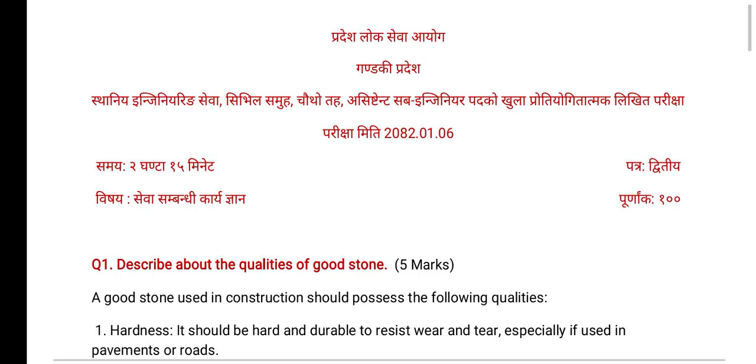प्रश्नोत्तर सहित हामी उपस्थित भइसकेका छौं। यहाँहरुलाई नमस्कार, स्वागत छ। प्रश्न नम्बर 1: Describe about the qualities of good stone.

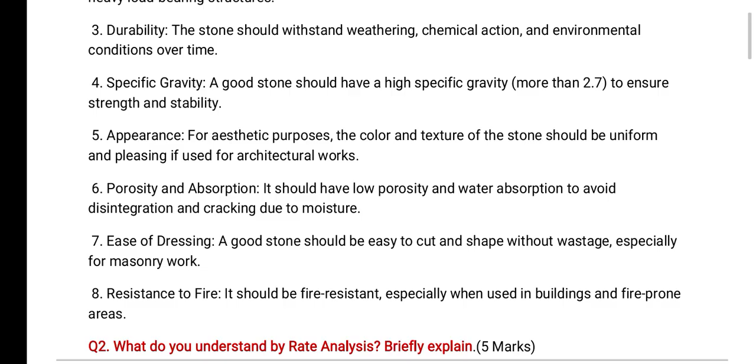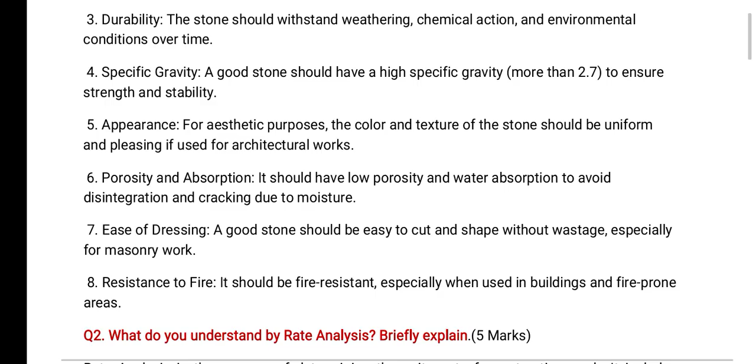सेक्सन ए को पहिलो प्रश्न जुन 5 मार्क्सको लागि सोधिएको थियो हामीले त्यो गर्यौं। अब हामी क्वेशन नम्बर 2 तर्फ लागौं। क्वेशन नम्बर 2 रहेको छ, What do you understand by rate analysis, briefly explain, 5 मार्क्समा सोधिएको छ।

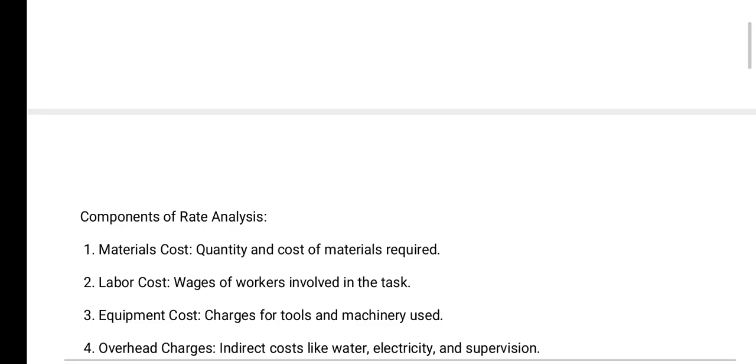र हाम्रो कम्पोनेन्ट्सहरु, rate analysisका कम्पोनेन्ट्सहरु के हुन्छ भन्दाखेरि एउटा मटेरियल कस्ट हुन्छ, एउटा लेबर कस्ट हुन्छ, इक्विपमेन्ट कस्ट, ओभरहेड चार्जेस एन्ड कन्ट्र्याक्टर्स प्रॉफिट।

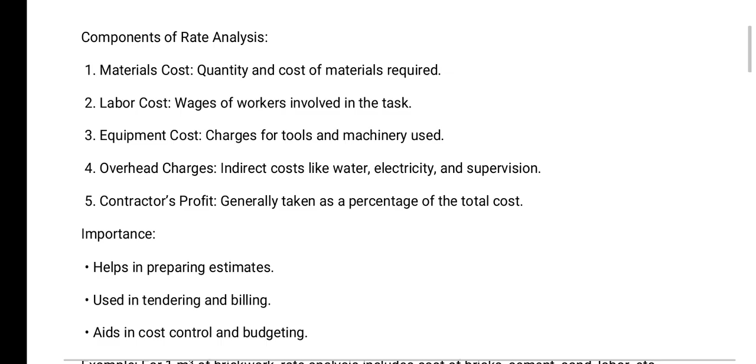Rate analysisको इम्पोर्टेन्सको बारेमा कुरा गर्नुपर्दा, it helps in preparing estimates. Rate analysis is used in tendering and billing, and rate analysis aids in constructing, cost control and budgeting.

Example of a rate analysis is for 1 meter cube of brickwork. Rate analysis includes cost of brick, cement, sand, and labor, etc.

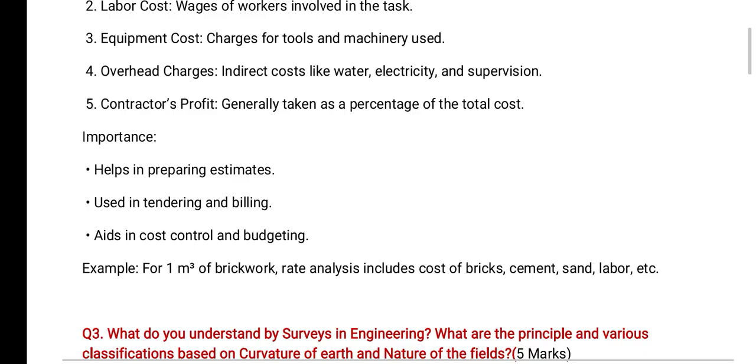Let's move towards question number 3, 5 marks को लागि नै रहेको छ। What do you understand by surveys in engineering? What are the principles and various classifications based on curvature of earth and nature of fields?

Surveying in engineering is the process of measuring and mapping the relative positions of natural and man-made features on Earth's surface. It is essential for planning, designing, and executing engineering projects like roads, bridges, buildings, etc.

Principles of surveying: working from whole to part. First, establish a control network, then do detailed work to reduce error accumulation. Next principle is location of a point by measurement from 2 points of reference, using methods like triangulation or intersection.

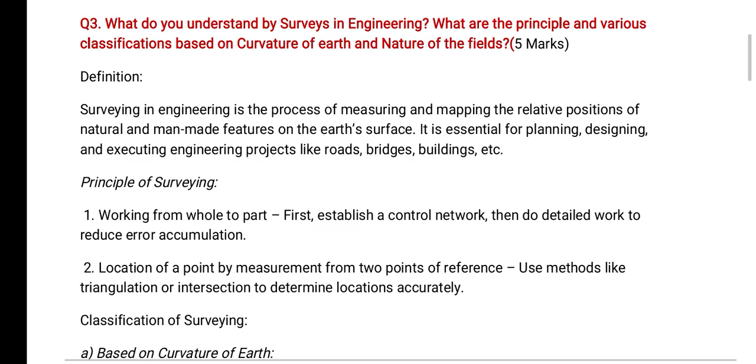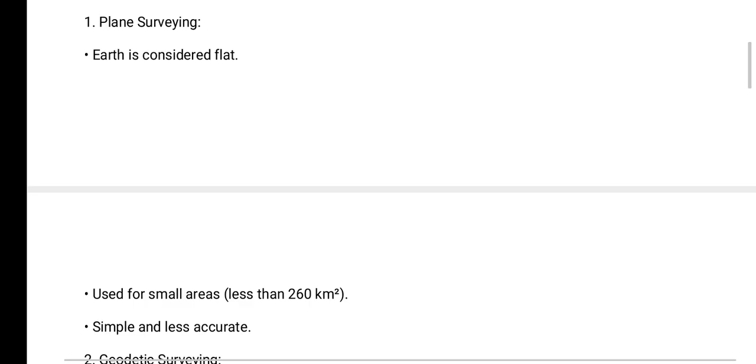Classification based on curvature of earth: plane surveying, where earth is considered flat. In plane surveying, area to be used is less than 260 square kilometer and it is a simple and less accurate process.

Likewise, next is geodetic surveying, where earth curvature is considered, used for large areas and requires sophisticated instruments and methods.

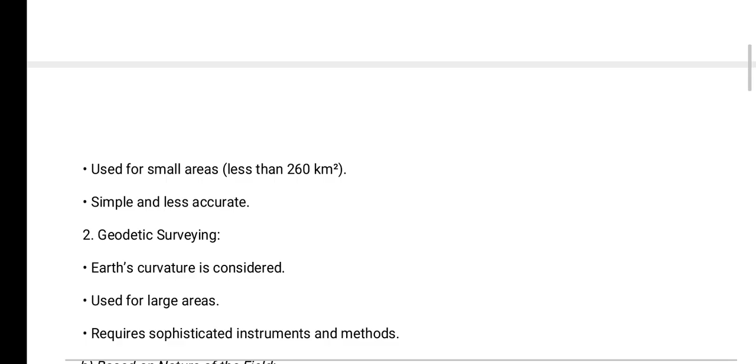Classification based on nature of field: number 1, topographical survey. Number 2, cadastral survey for property boundaries and land ownership.

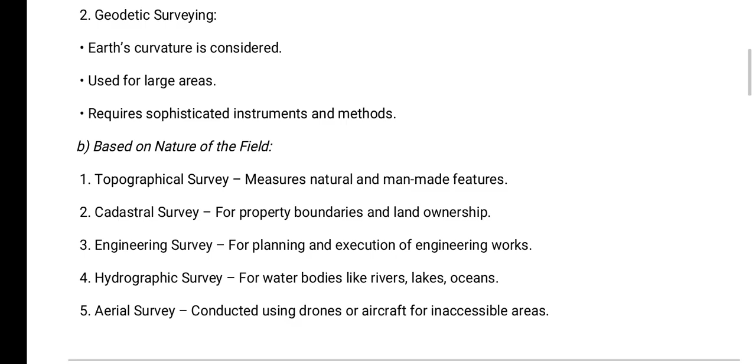Number 3, engineering survey for planning and execution of engineering works. Number 4, hydrographic survey for water bodies like rivers, lakes and oceans. Number 5, aerial survey conducted using drones or aircraft for inaccessible areas.

Next question is question number 4, 5 marks को लागि। Write the differences between waterproofing and dampproofing, provide a comparative note भनेको छ।

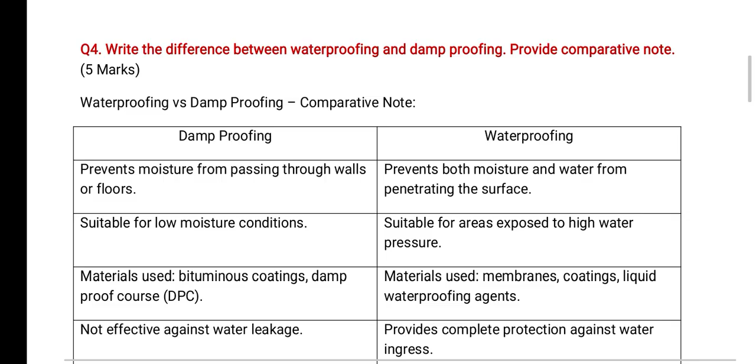ड्याम प्रुफिङ र वाटर प्रुफिङको यहाँ टेबुलर फर्मेटमा एन्सर छ। Dampproofing prevents moisture from passing through walls or floors. Likewise, waterproofing prevents both moisture and water from penetrating the surface.

Dampproofing is suitable for low moisture conditions. Waterproofing is suitable for areas exposed to high water pressure.

Dampproofing materials used are bituminous coatings, dampproof course. For waterproofing, materials used are membranes, coatings, liquid waterproofing agents.

Dampproofing is not effective against water leakage. Waterproofing provides complete protection against water.

Dampproofing is less expensive and easier to apply. Likewise, waterproofing is more costly and requires skilled manpower.

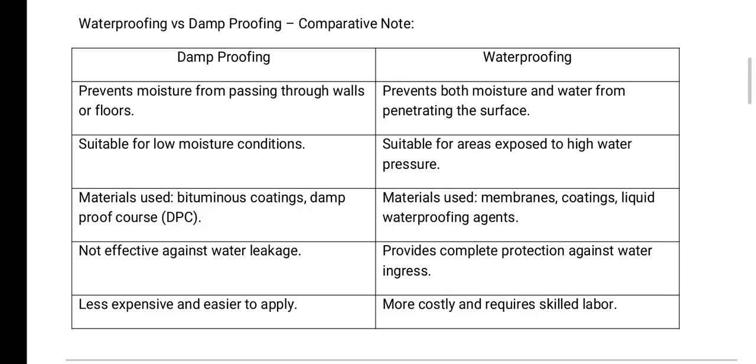Damp proofing is used for moisture control in walls and floors, while waterproofing provides full protection against water under pressure. Waterproofing is essential in basements, roofs and water retaining structures.

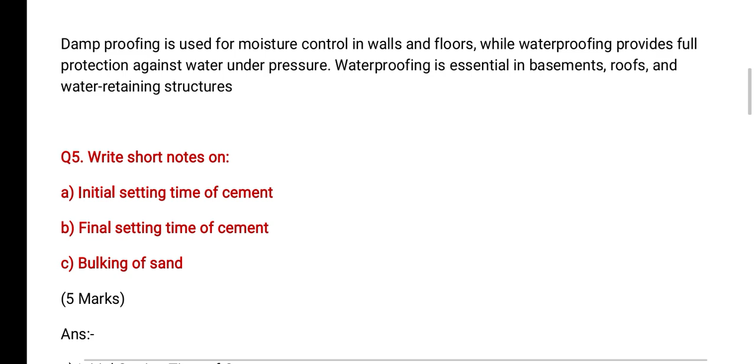Question number 5 for 5 marks. Write short notes on initial setting time, final setting time and bulking of sand.

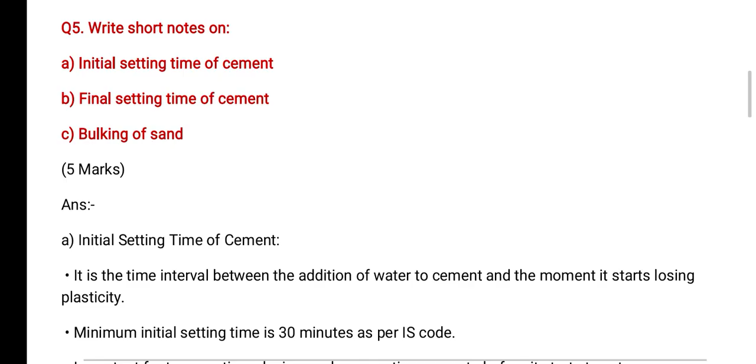Initial setting time is the time interval between the addition of water to cement and the moment it starts losing plasticity. Minimum initial setting time is 30 minutes as per IS code. It is important for transporting, placing and compacting concrete before it starts to set.

Final setting time of cement is the time when the cement paste has completely lost its plasticity and becomes hard. Maximum final setting time is 600 minutes for ordinary Portland cement. After this time, formwork can be removed and the structure starts gaining strength.

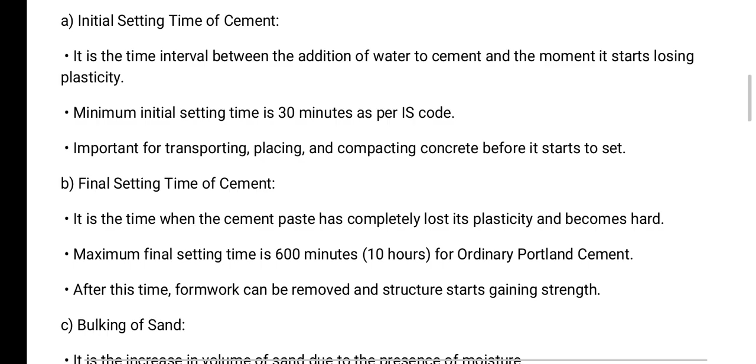Bulking of sand is the increase in volume of sand due to the presence of moisture. It occurs because moisture forms a thin film around sand particles, causing them to repel each other. Maximum bulking can be up to 30 to 35% when moisture content is about 4 to 6%. This must be considered during mix design to avoid undersanding.

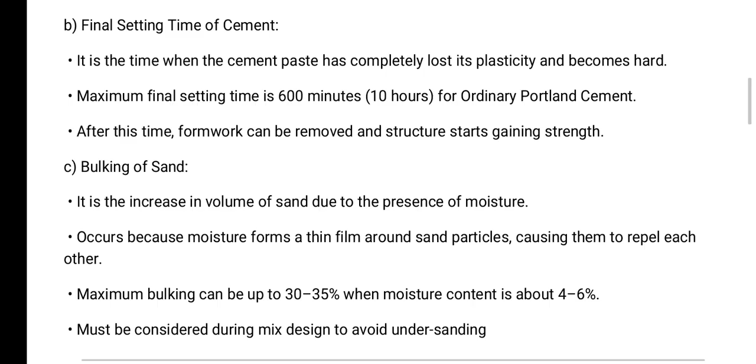Next question, question number 6 for 5 marks. Write down the important characteristics of contour. Contours are imaginary lines drawn on the map that connect points of equal elevation. The following are the important characteristics of contour.

Contours never intersect, since a point cannot have two different elevations, contour lines never cross each other. Uniform vertical interval: contour lines are drawn at regular intervals of elevation called the contour interval.

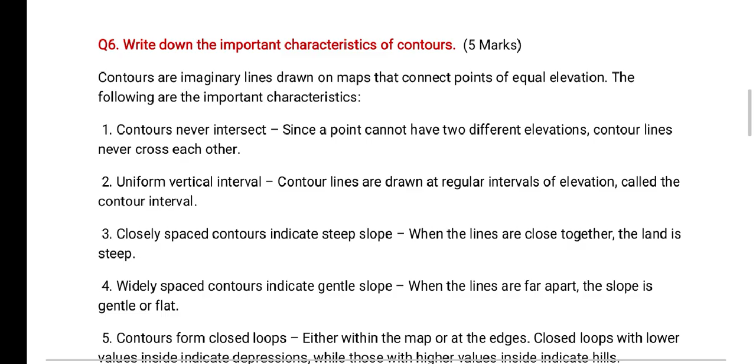Closely spaced contours indicate steep slope. Widely spaced contours indicate gentle slope. Contours form closed loops either within the map or at the edges.

Closed loops with higher values indicate hills, while those having lower values indicate depressions.

Contours bend upstream in valleys and downstream on ridges. The V-shape formed by contours indicates the direction of flow in valleys.

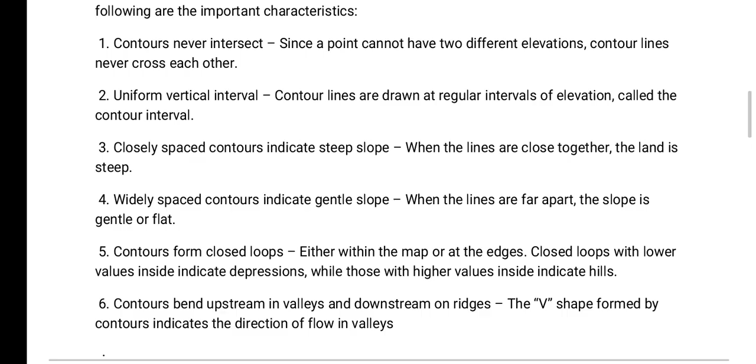Write down the characteristics of good paints. Question number 7 for 10 marks. A good paint used in construction and finishing work should have the following characteristics.

Good covering power. Durability: it should withstand weather conditions like rain, sun and humidity, and should not peel, crack or fade easily. Quick drying: a good paint should dry quickly after application to reduce labor time. Smooth and attractive finish: it should provide a uniform and aesthetically pleasing surface finish.

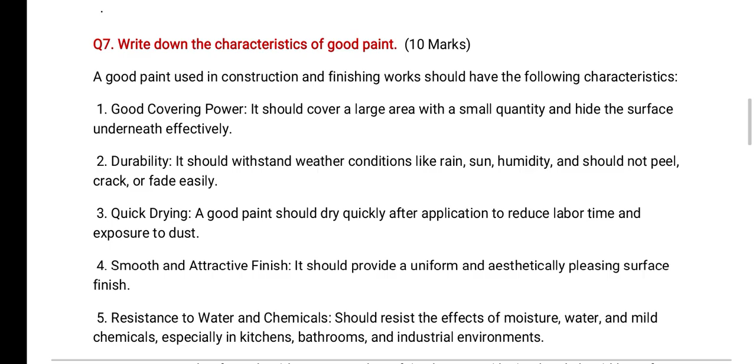Resistance to water and chemicals: should resist the effect of moisture, water and mild chemicals, especially in kitchens and bathrooms. Non-toxic and safe: it should not contain harmful substances like lead and should be safe for humans and the environment.

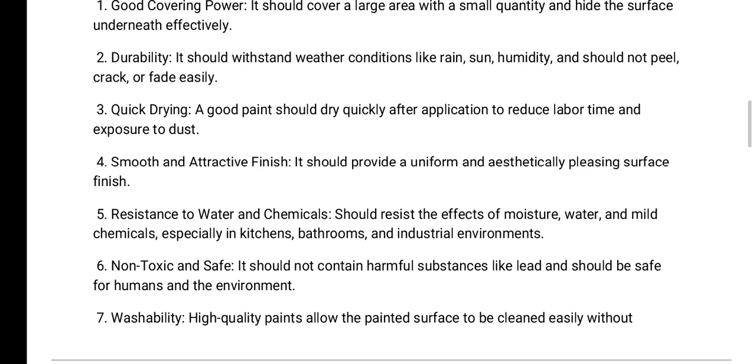Washability: high quality paints allow the painted surface to be cleaned without affecting the finish. Good adhesion: it must adhere well to the surface without flaking or blistering. Workability: it should be easy to apply using brush, roller or spray. Cost effective: should provide good value.

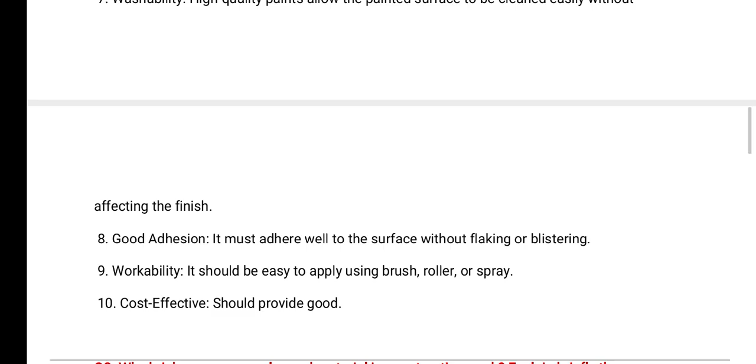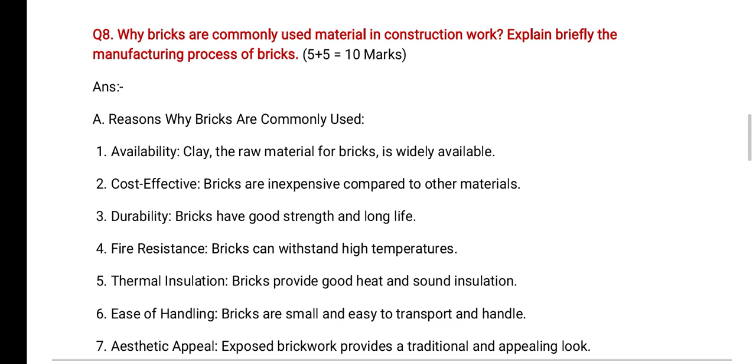Question number 8 for 10 marks. Why are bricks a commonly used material in construction work? Explain briefly the manufacturing process of bricks. Reasons why bricks are used:

Availability, cost effectiveness, durability, fire resistance, thermal insulation.

Bricks provide good heat and sound insulation. Ease of handling: bricks are small and easy to transport and handle. Aesthetic appeal: exposed brickwork provides a traditional and appealing look.

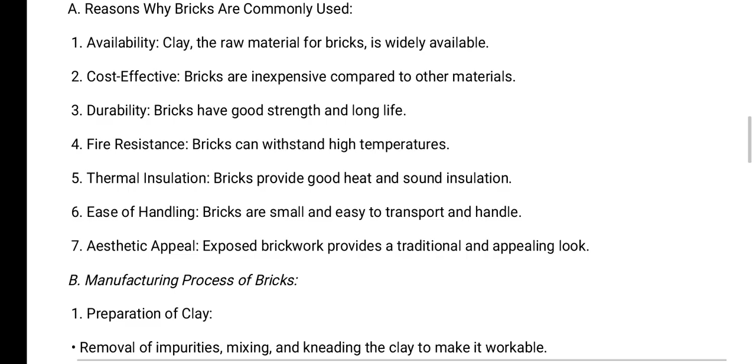Manufacturing process of bricks: preparation of clay, removal of impurities, and mixing and kneading the clay to make it workable.

Molding: shaping the bricks using hand molds or machines. Can be ground molded, table molded or machine molded.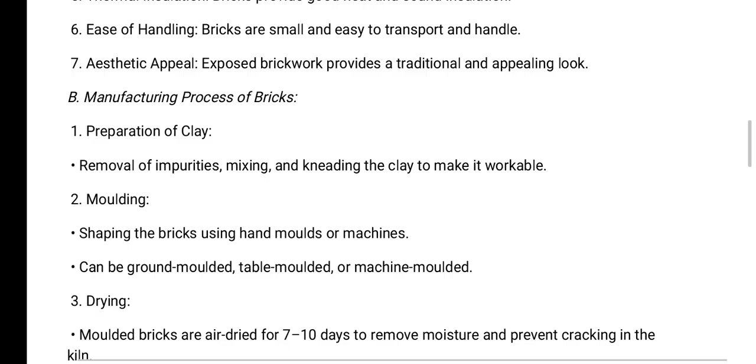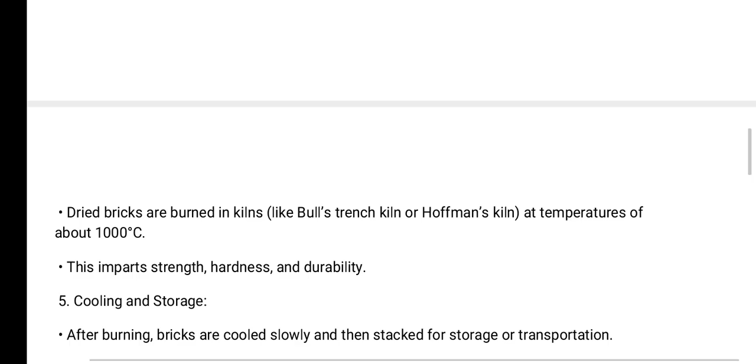Drying: molded bricks are air dried for 7 to 10 days to remove moisture and prevent cracking in the kiln. Burning: dried bricks are burned in a kiln like Bull's Trench kiln or Hoffman's kiln at a temperature of about 1000 degrees centigrade.

Cooling and storage: after burning, bricks are cooled slowly and then stacked for storage or transportation.

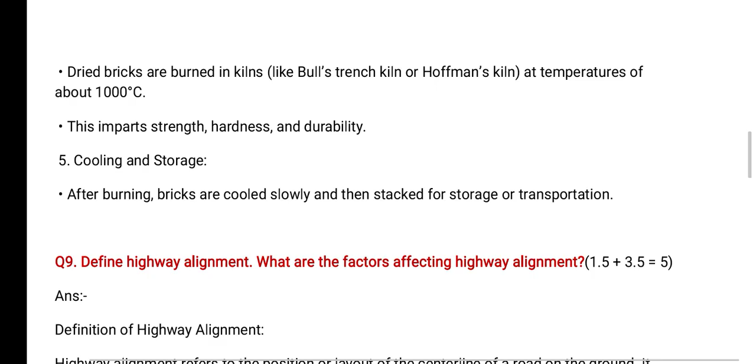Question number 9 for 5 marks. Define highway alignment. What are the factors affecting highway alignment? Highway alignment refers to the position or layout of the center line of road on the ground. It can be divided into horizontal alignment, the direction of road in horizontal plane: curves, straight paths. Vertical alignment, the elevation or gradient of the road in the vertical plane: slopes, valleys, hills.

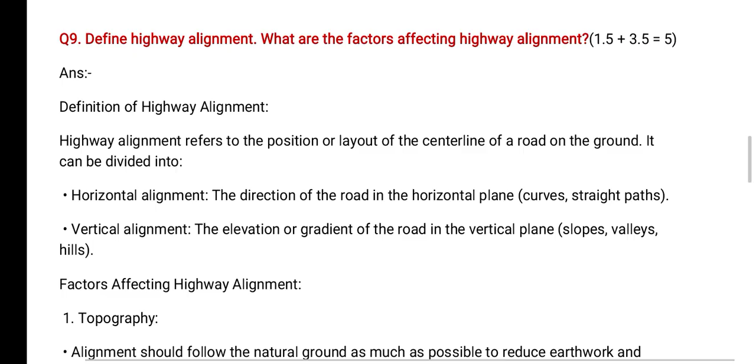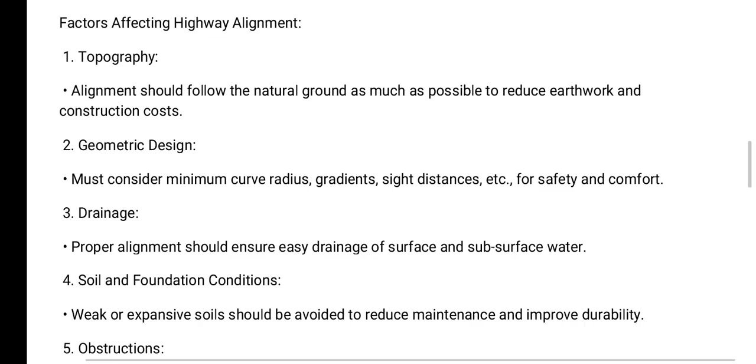Factors affecting highway alignment. Topography: alignment should follow the natural ground as much as possible to reduce earthwork and construction costs. Geometric design: must consider minimum curve radius, gradients, sight distances, etc. for safety and comfort. Drainage: proper alignment should ensure easy drainage of surface and subsurface water. Soil and foundation conditions: weak or expansive soil should be avoided to reduce maintenance and improve durability.

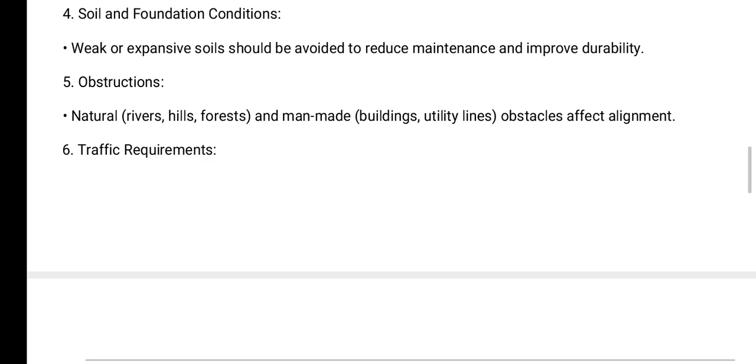Obstructions: natural rivers, hills, forests and man-made buildings, utility lines, obstacles affect alignment. Traffic requirements: alignment should suit present and future traffic volumes and type of vehicles. Cost and economy: the alignment should be economical in terms of construction, land acquisition and maintenance. Environmental and social impact: alignment should minimize damage to environment and displacement of people.

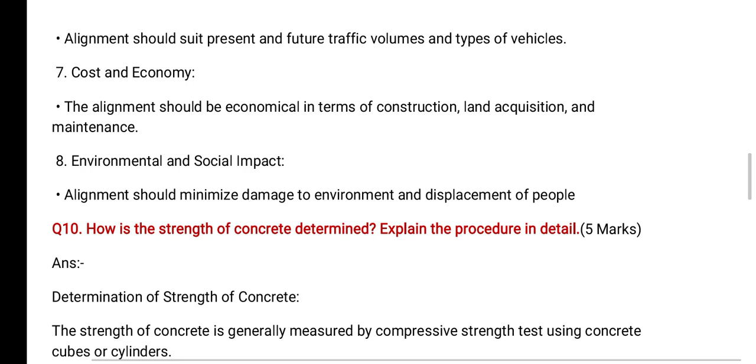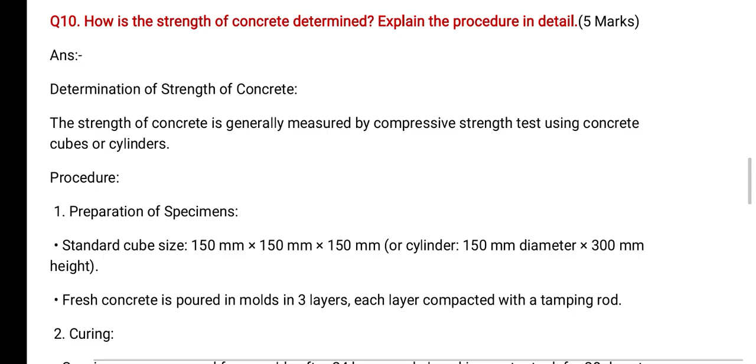Question number 10 for 5 marks. How is the strength of concrete determined? Explain the procedure in detail. The strength of concrete is generally measured by compressive strength test using concrete cubes or cylinders. Procedure. Number 1, preparation of specimen. Standard cube size 150 mm by 150 mm by 150 mm or cylinder of 150 mm diameter and 300 mm height is considered. Fresh concrete is poured in molds in 3 layers, each layer compacted with a tamping rod. Number 2, curing. Specimens are removed from the molds after 24 hours and placed in a water tank for 28 days to ensure proper hydration and strength gain.

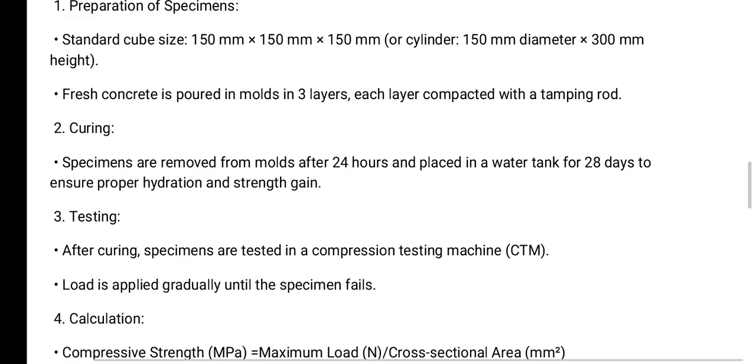Number 3, testing. After curing, specimens are tested in a compression testing machine. Load is applied gradually until the specimen fails. Number 4, calculation. Compressive strength in megapascals equals maximum load divided by cross-sectional area. Number 5, standard testing ages. Tests are usually done for 7 days, 14 days and 28 days.

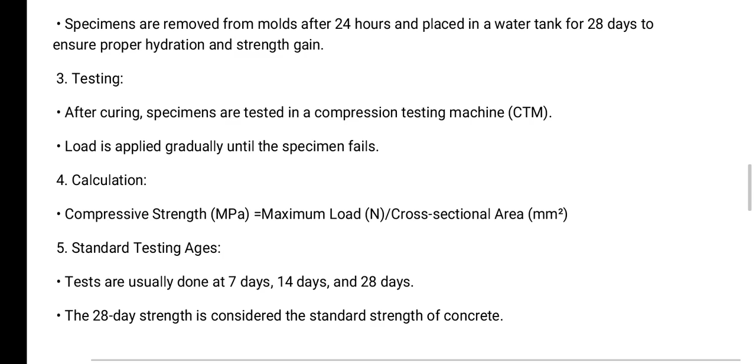Question number 11 for 5 marks. What safety measures must be followed on a construction site? Safety measures on a construction site: number 1, personal protective equipment (PPE). All workers should wear helmets, safety boots, gloves, high visibility vests and eye protection. Number 2, site fencing and signage. The construction site must be enclosed with fencing and proper warning and directional signs should be placed. Number 3, proper scaffolding and ladders. Use of strong and properly fixed scaffolding and ladders to prevent falls.

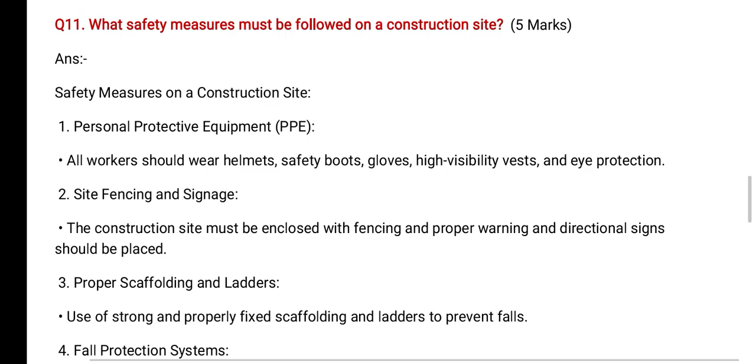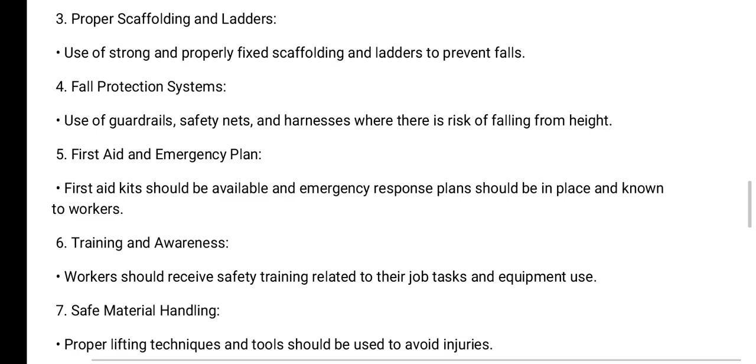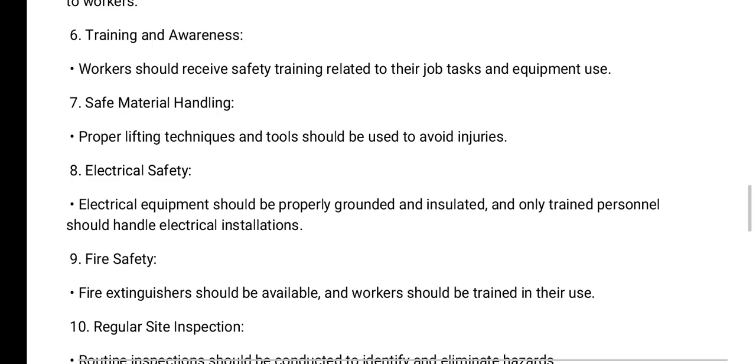Number 4, fall protection system. Use of guardrails, safety nets and harnesses where there is a risk of falling from height. Number 5, first aid and emergency plan. Number 6, training and awareness. Workers should receive safety training related to their job, tasks and equipment use. Number 7, safe material handling. Proper lifting techniques and tools should be used to avoid injuries. Number 8, electrical safety. Electrical equipment should be properly grounded and insulated. Number 9, fire safety. Fire extinguishers should be available and workers should be trained in their use. Number 10, regular site inspection. Routine inspections should be conducted to identify and eliminate hazards.

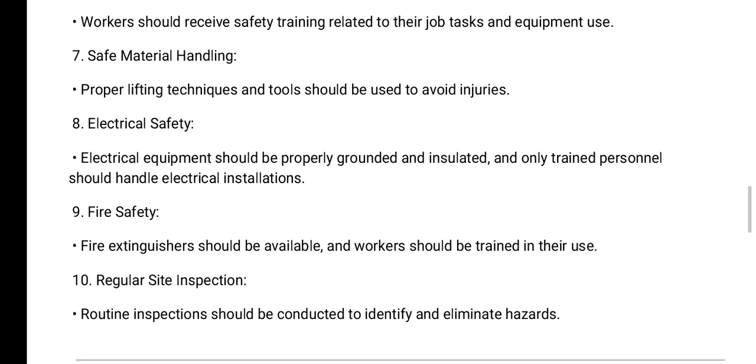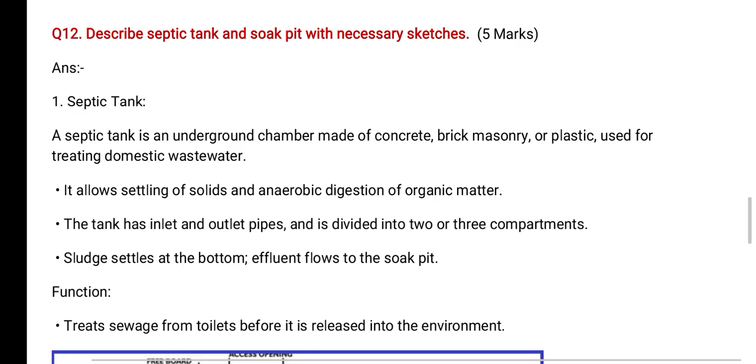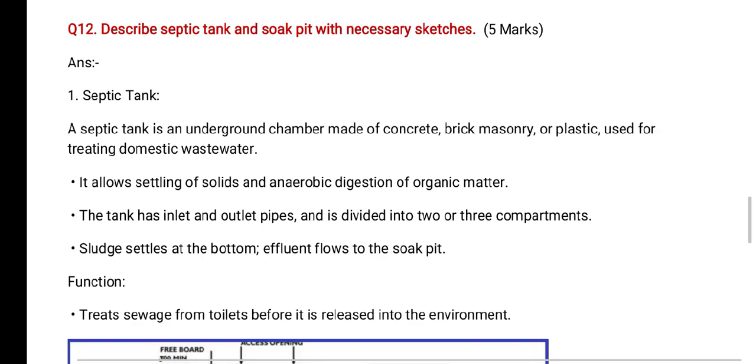Question number 12 for 5 marks. Describe septic tank and soak pit with necessary sketches. A septic tank is an underground chamber made of concrete, brick masonry or plastic used for treating domestic wastewater. It allows settling of solids and anaerobic digestion of organic matter. The tank has inlet and outlet pipes and is divided into 2 or 3 compartments. Sludge settles at the bottom. Effluent flows to the soak pit. Function: treats sewage from toilets before it is released into the environment. The diagram of soak pit and septic tank is shown below.

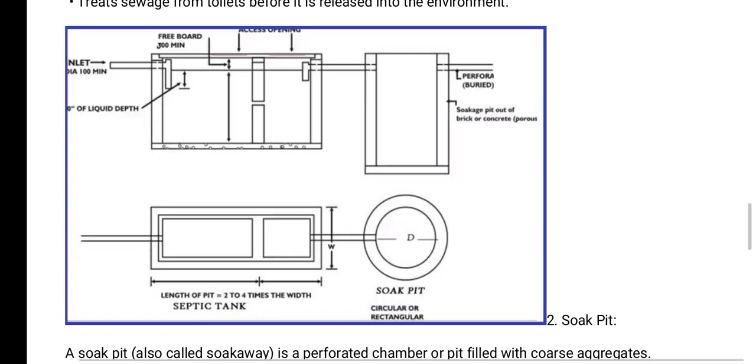Number 2, soak pit. A soak pit, also called soakaway, is a perforated chamber or pit filled with coarse aggregates. It receives the liquid effluent from the septic tank. The water percolates slowly into the surrounding soil through infiltration. Function: allows treated water to seep into the ground, preventing waterlogging and pollution.

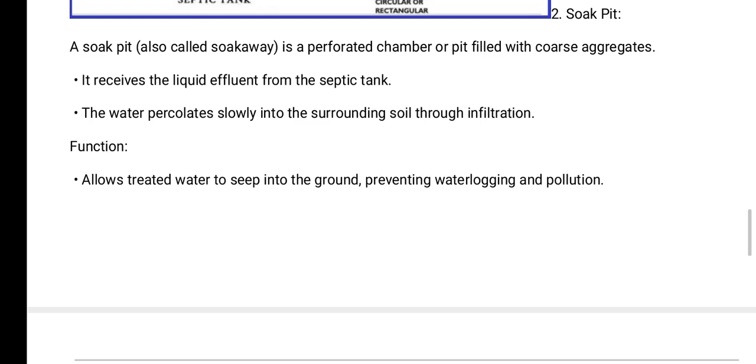Question number 13 for 5 marks. What is earthquake resistant building construction? Describe different types of building construction techniques used in Nepal. Earthquake resistant construction refers to the design and construction of buildings that can withstand seismic forces during an earthquake, minimizing damage and ensuring safety. It includes proper structural design, material selection and construction practices that enhance a building's strength, flexibility and stability.

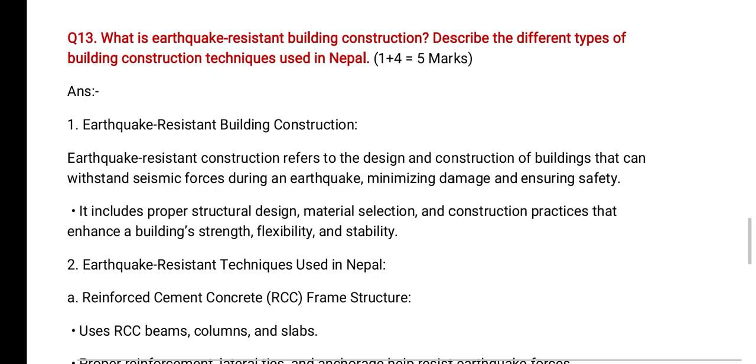Earthquake resistant techniques used in Nepal. Reinforced cement concrete framed structure: RCC structure uses RCC beams, columns and slabs. Proper reinforcement, lateral ties and anchorage help resist earthquake forces. Masonry with reinforcement: brick or stone masonry with horizontal and vertical reinforcement. Use of cement mortar and proper bonding improves resistance.

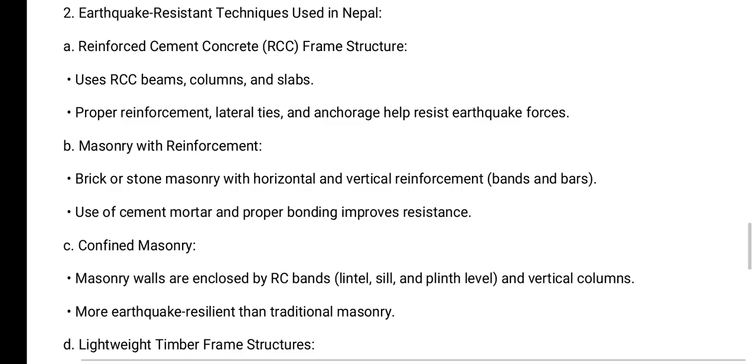Confined masonry: masonry walls are enclosed by RC bands at lintel, sill and plinth level and vertical columns. More earthquake resilient than traditional masonry. Lightweight timber framed structures: flexible and lightweight, perform well during earthquakes, common in hilly areas like eastern and far western Nepal.

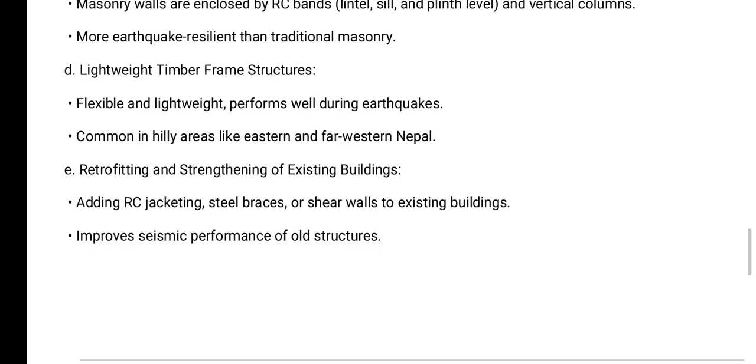Retrofitting and strengthening of existing buildings: adding RC jackets, steel braces or shear walls to existing buildings improves seismic performance of old structures. Question number 14 for 10 marks.

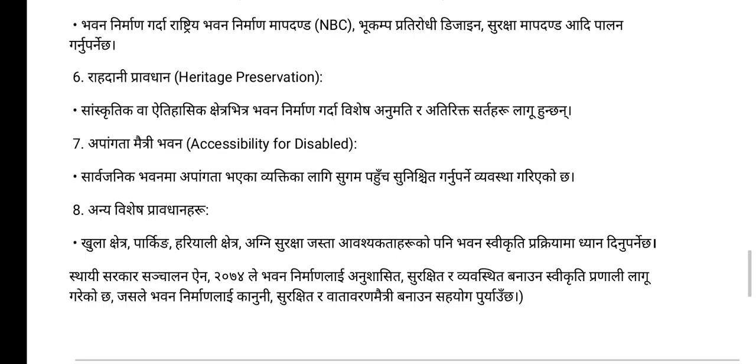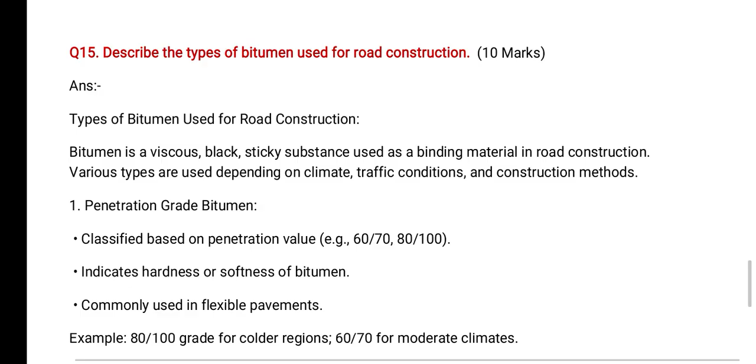Question number 15. Describe the types of bitumen used for road construction. 10 marks. Bitumen is a viscous black sticky substance used as a binding material in road construction. Various types of bitumen are: penetration grade bitumen, classified based on penetration value, for example 60/70, 80/100, which indicates hardness or softness of bitumen, commonly used in flexible pavements.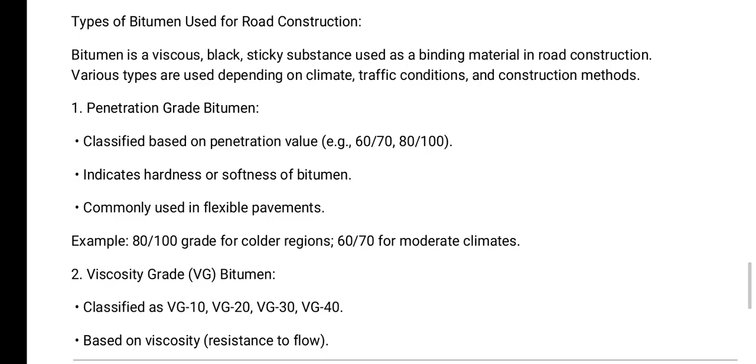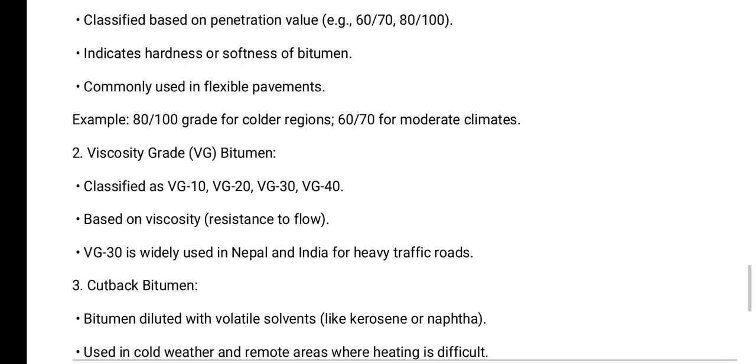Number 2, viscosity grade VG bitumen, classified as VG10, VG20, VG30 and VG40 based on viscosity. VG30 is widely used in Nepal and India for heavy traffic roads. Cutback bitumen: bitumen diluted with volatile solvents like kerosene or naphtha, used in cold weather and remote areas where heating is difficult. Types: rapid curing RC, medium curing MC and slow curing SC.

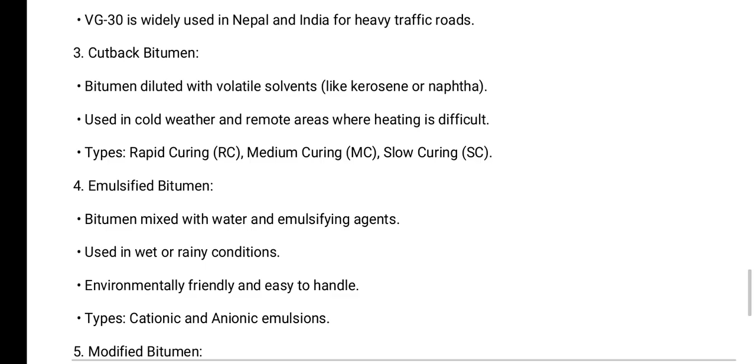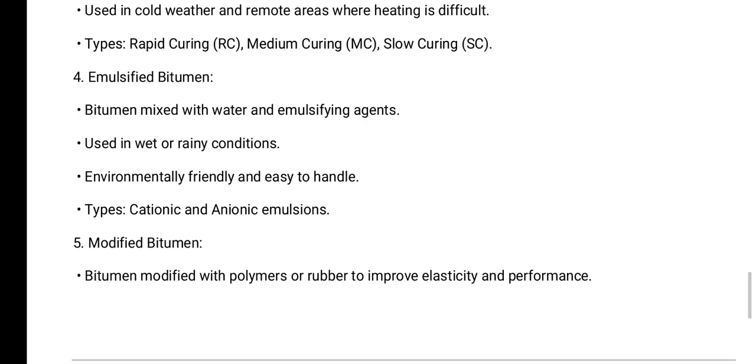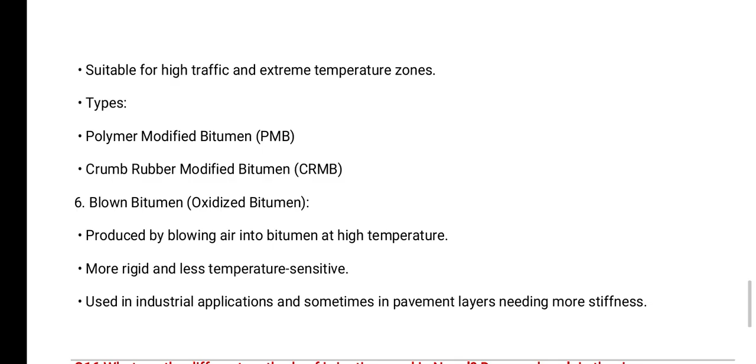Number 4, emulsified bitumen: bitumen mixed with water and emulsifying agents, used in wet or rainy seasons, environmentally friendly and easy to handle. Modified bitumen: bitumen modified with polymers or rubbers to improve elasticity and performance, suitable for high traffic and extreme temperature conditions. Number 6, blown bitumen or oxidized bitumen, produced by blowing air into bitumen at high temperature, more rigid and less temperature susceptible.

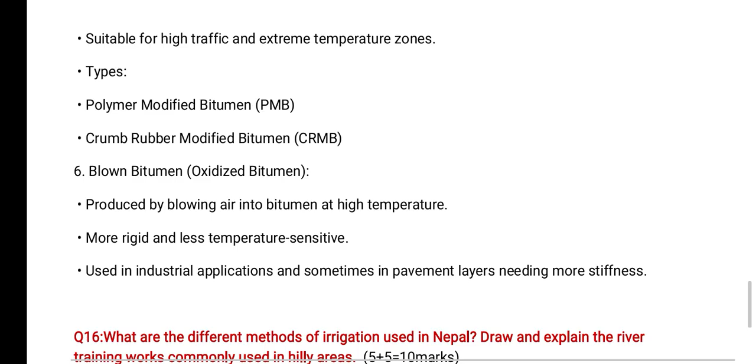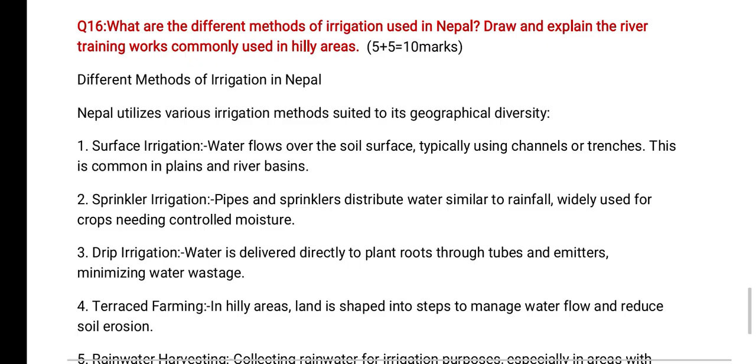Question number 16, last question for the day for 10 marks. What are the different methods of irrigation used in Nepal? Draw and explain the river training works commonly used in hilly areas. Different methods of irrigation in Nepal. Nepal utilizes various irrigation methods such as surface irrigation: water flows over the soil surface, typically using channels or trenches. This is common in plains and river basins. Sprinkler irrigation: pipes and sprinklers distribute water similar to rainfall, widely used for crops needing controlled moisture.

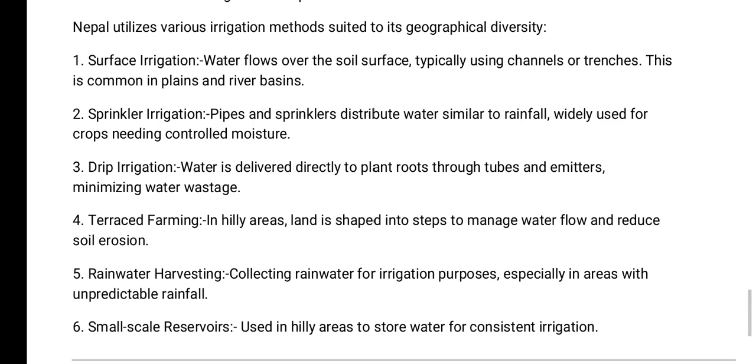Drip irrigation: water is delivered directly to plant roots through tubes and emitters. Terraced farming: in hilly areas, land is shaped into steps to manage water flow and reduce soil erosion. Number 5, rainwater harvesting: collecting rainwater for irrigation purposes, especially in areas with unpredictable rainfall. Small scale reservoirs used in hilly areas to store water for consistent irrigation.

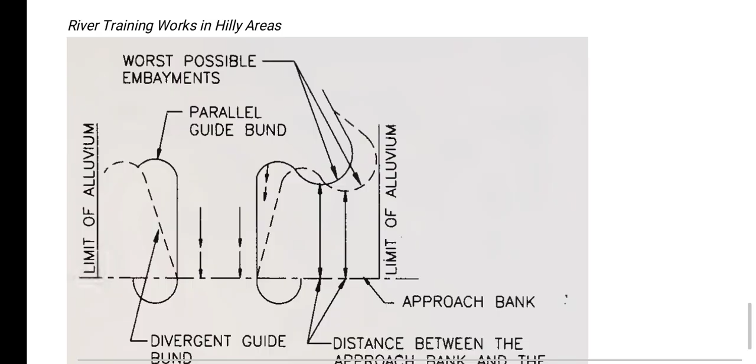River training works in hilly areas. In hilly areas of Nepal, river training works are designed to manage water flow and prevent erosion while optimizing irrigation. Retaining walls, constructed to prevent erosion and protect nearby land. Guide banks, used to direct the river's flow and prevent it from meandering. Spurs, structures projecting into water to control the current and minimize erosion on the banks. Embankments, elevated ridges along the river banks to protect against flooding.